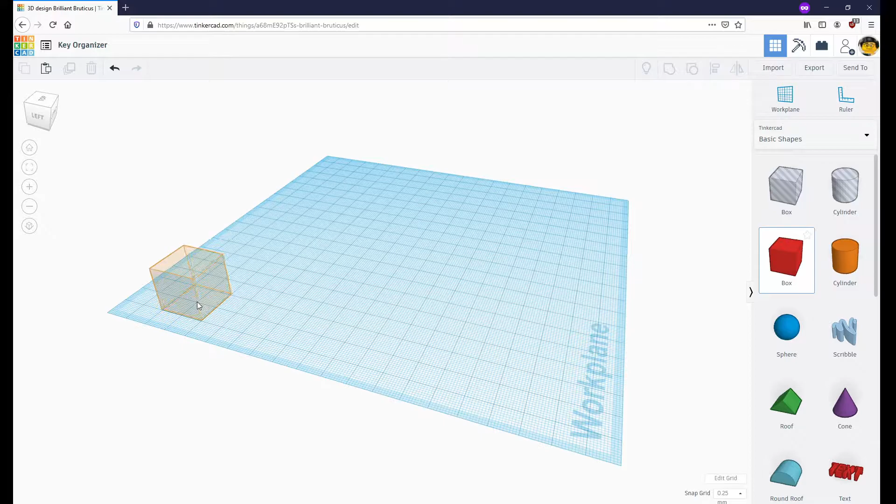Now, for the dimensions for this box, we want it to fit a piece of mail. I measured a piece of mail that I had, and it's approximately, for example, an envelope is approximately 22 centimeters by 10 centimeters, or in this case, 220 millimeters. But you'll notice that that is still a bit too large.

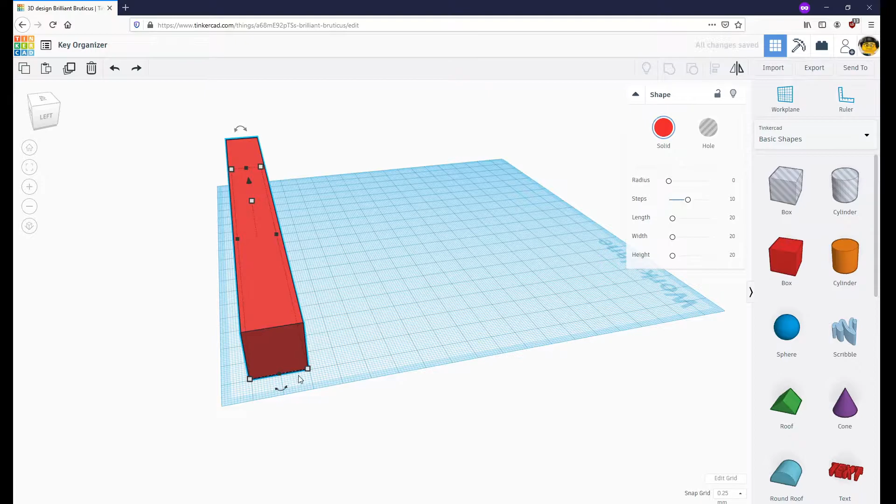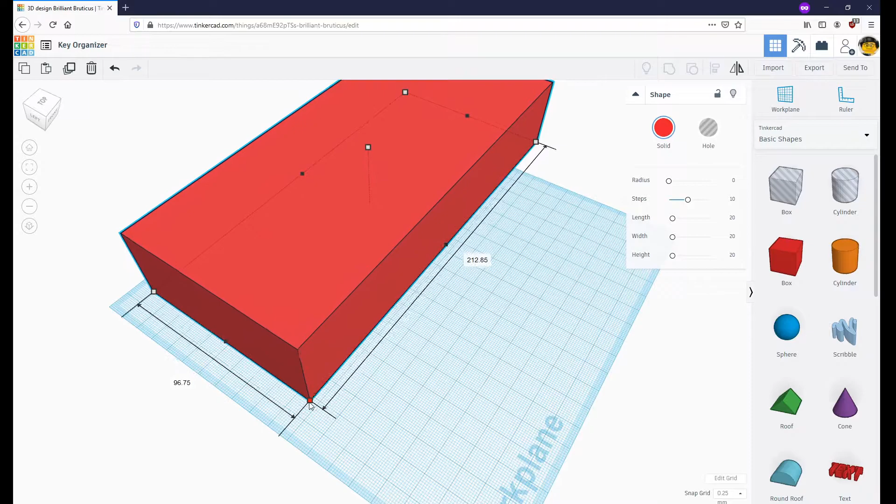Oops, I accidentally displaced it there by 100 instead of changing the dimensions. Now, in order to rectify this, there's two ways. We can simply click on the corner here and adjust each dimension manually. So if I wanted to cut it in half, I could just simply divide the number by 2. Or clicking on the corner and holding Shift keeps the aspect or dimension ratio while we scale up or down.

I prefer to enter things manually, it just makes it a lot quicker. We're just going to line it up with this corner here, because since we are using somewhat exact measurements today, we do want to make sure that our snap grid is lined up accordingly.

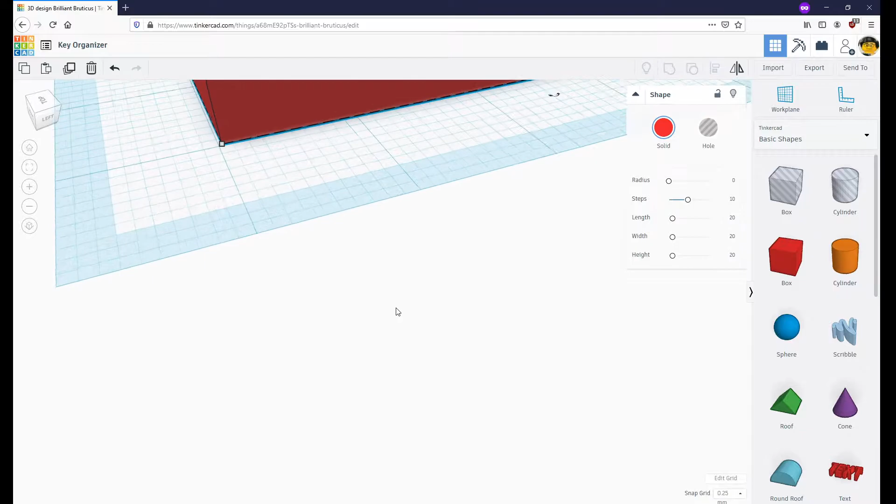So if I could just figure out how to zoom here, there we go. And keyboard controls, again, arrow keys, very useful. Just move it once along the grid and we're good to go.

So the dimensions that I started with are actually still a little too small. If we're trying to fit mail inside of this object, we need to actually expand it by a bit. So I'm going to give us about a 5 millimeter leeway on each side, making it about 120 by 60.

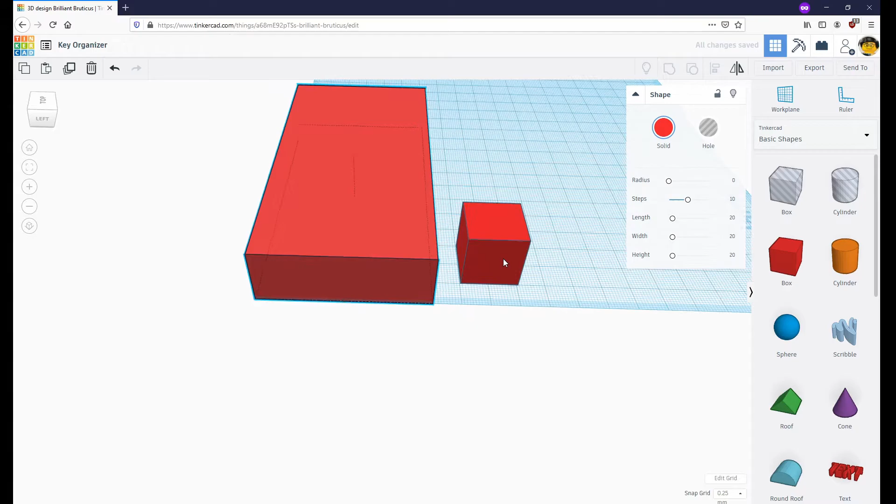The reason I did that is because we're actually going to be cutting out material from the inside of this box, as you'll see in a bit. So cutting out material, if we have too much of it, it makes it easier to work with as opposed to having to exactly measure the complete inside of this object.

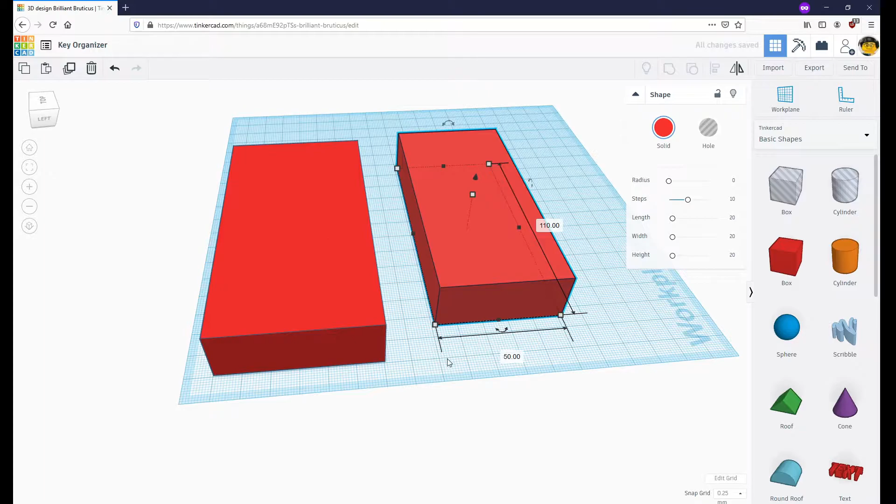So here, I'm simply adjusting this to be the length and width of a piece of mail. And now you can see why I did what I did. If I fit this box inside of the larger box, you can start to see how an envelope would actually fit inside of it.

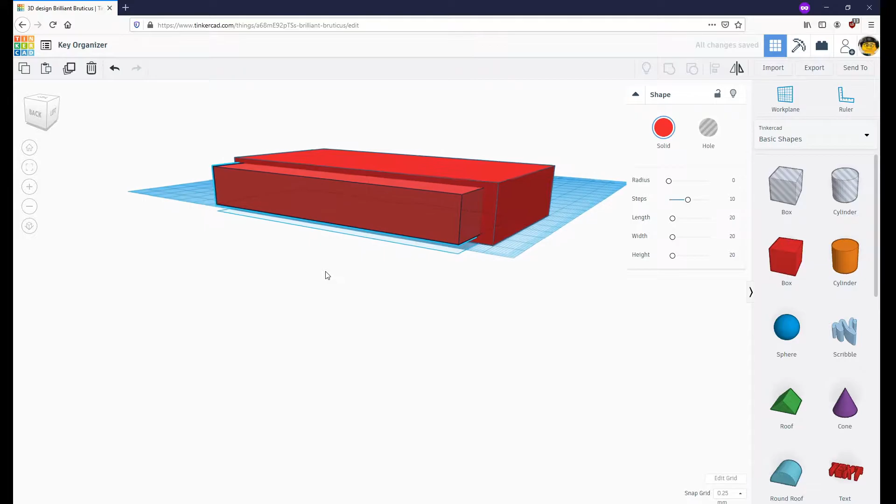So now we have an actual envelope holder as opposed to an envelope replacement, so to speak. Now, you can try and eyeball the position that you're going to cut out, or you can use the alignment tool up top by selecting both and simply click on the axes that you want to align it with. So here I'm going to click align and make sure it is aligned vertically so that we have the same amount of material both at the front and at the back, or in this case the top or the bottom.

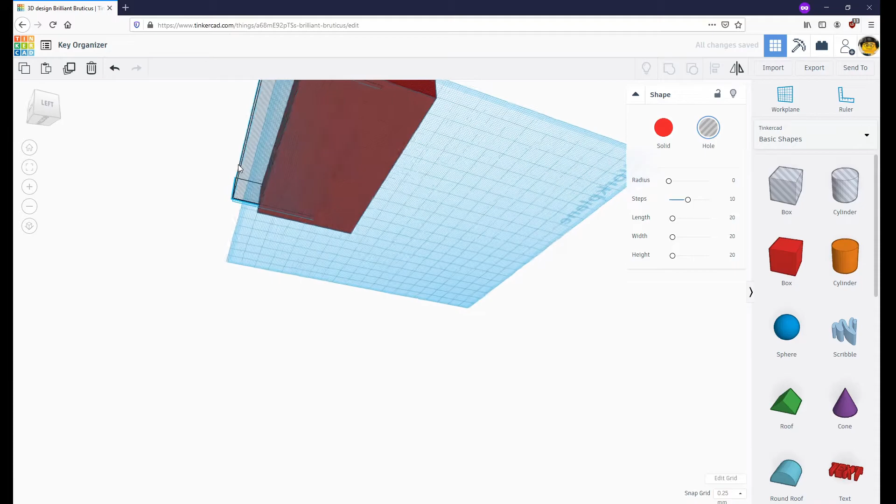I'm going to select the hole option for the middle box and making sure that I'm not going through the back of the object. I'm then going to group both of them, and you'll notice that it will cut out a nice slot for our mail to go into. And you select both, by the way, by holding Shift and just clicking on additional objects.

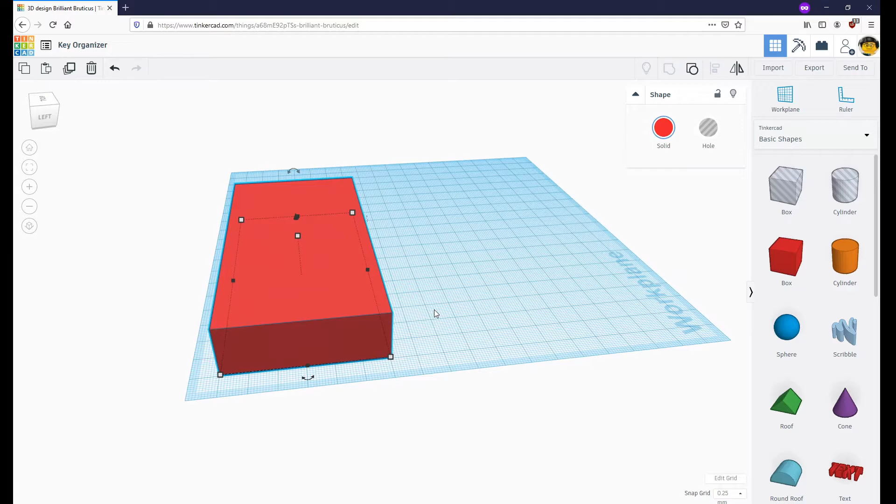And there we go. Now that you've got your mail slot figured out, well, what about the key organizer? So how do we go about adding hooks to the face of this object? We have a few designs that we can choose from that are kind of pre-made already, but what we're going to do here is insert a round roof.

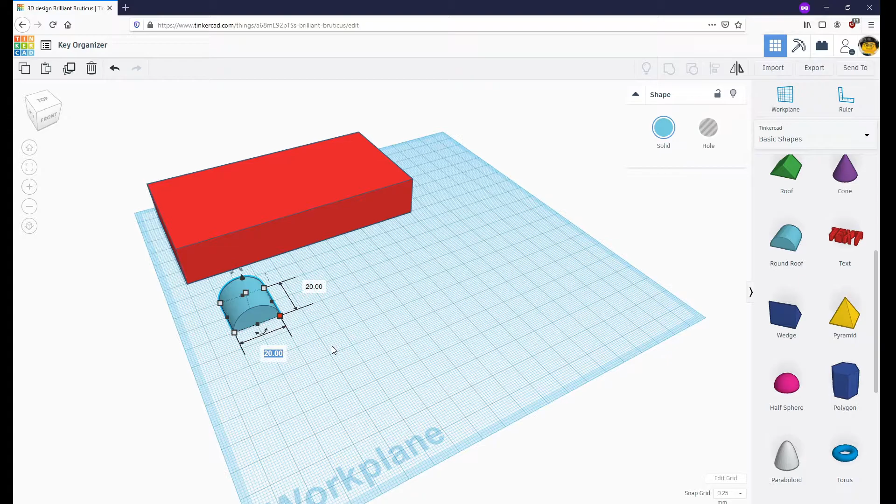So already you can see it kind of has a little hook shape, if only it were hollow. So let's go ahead and make it a little smaller, just because we don't really need it to be that large. It would be a good idea, by the way, to measure if you have any specific key rings. If your key rings are a little smaller, you might want to adjust the size or the width of these to make sure it fits. But for now, I'm just going to show you the process without worrying too much about the size.

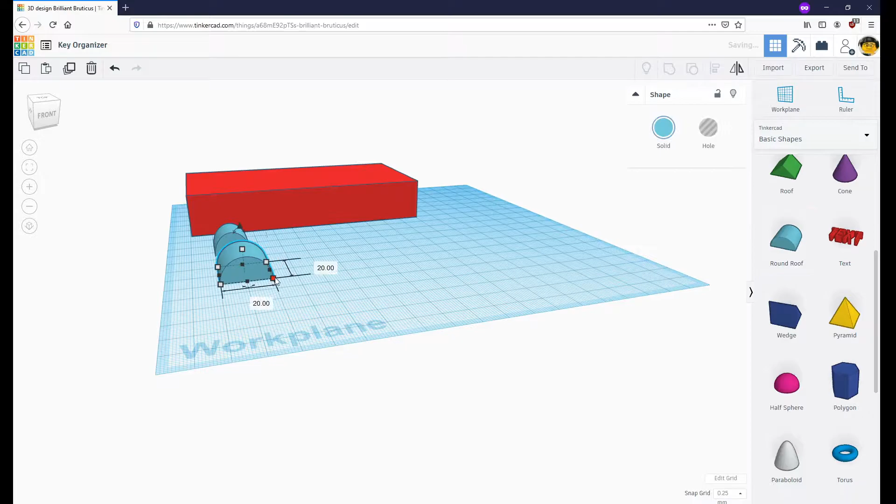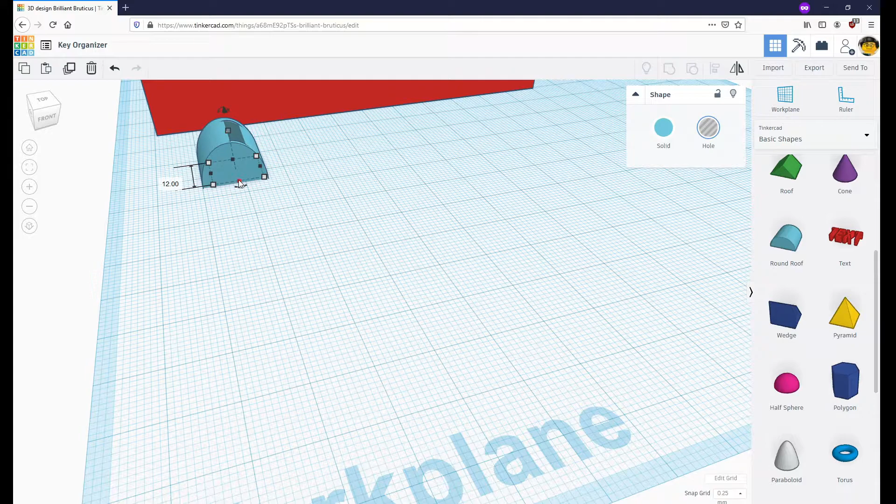So here, I changed the original to about 15 by 15. Here we have a 12 by 12. And what that's going to let me do now is slide this underneath the original, and simply adjusting the width and choosing hole for that object now lets me see what I'm going to be cutting out. And the solid that is remaining looks an awful lot like a hook.

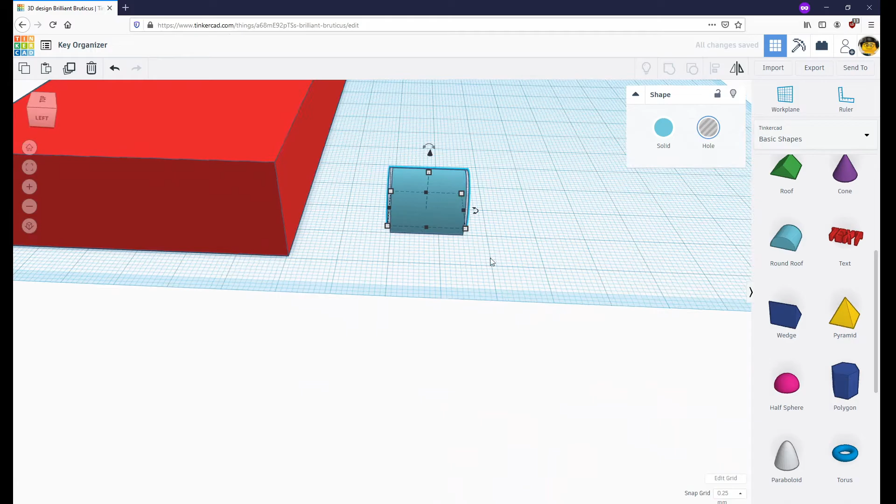So here, just using the keyboard controls to make sure it's lined up properly, I can then adjust the shape to be totally customized. Again, I can choose the length of the hook, the width of the hook, so I have full control over that, and that's part of the reason why we teach you these skills. So there you go. We have a hook that we can now adjust and attach to the face of our object.

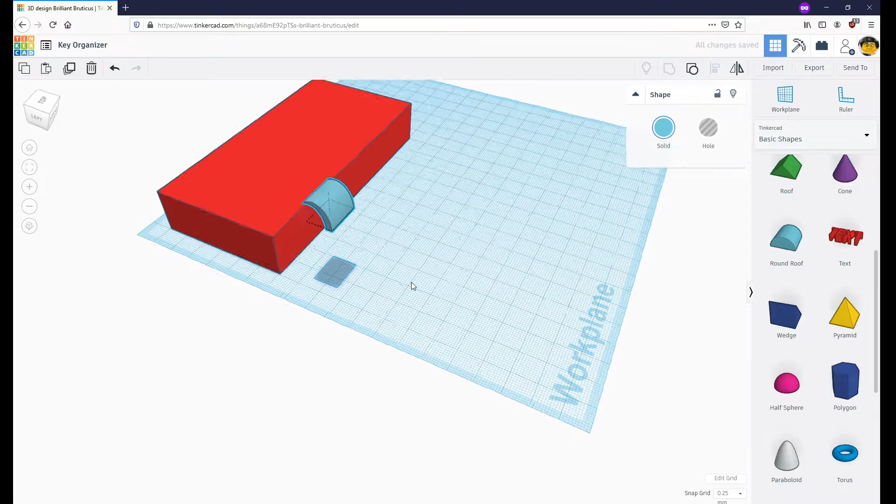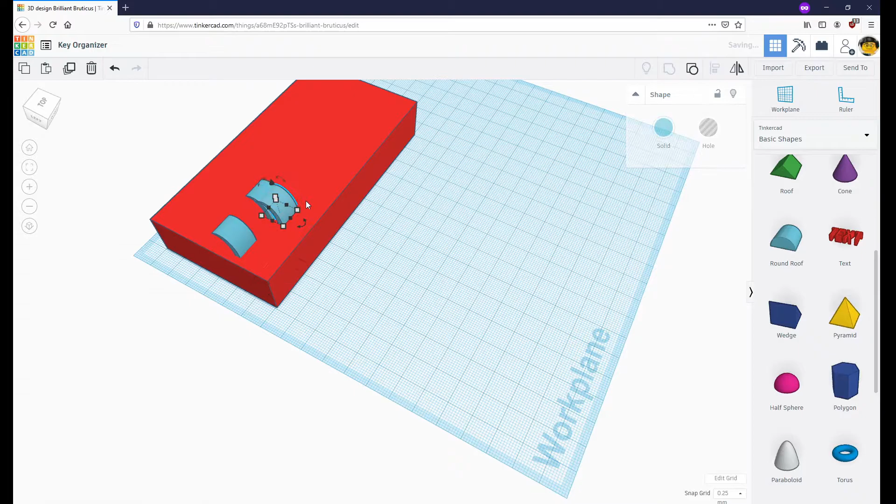Once you have it rotated and lined up, simply raise it up and move it on over to the face. Now you may need to move the camera around, zoom in, zoom out, do whatever you need to make sure it's lined up. Doesn't quite snap to it like we'd like, but here I do end up making it a little less wide. And I'm simply selecting and hitting Control C and Control V on Windows, Command C and Command V on Mac, and that lets me copy and paste all of these.

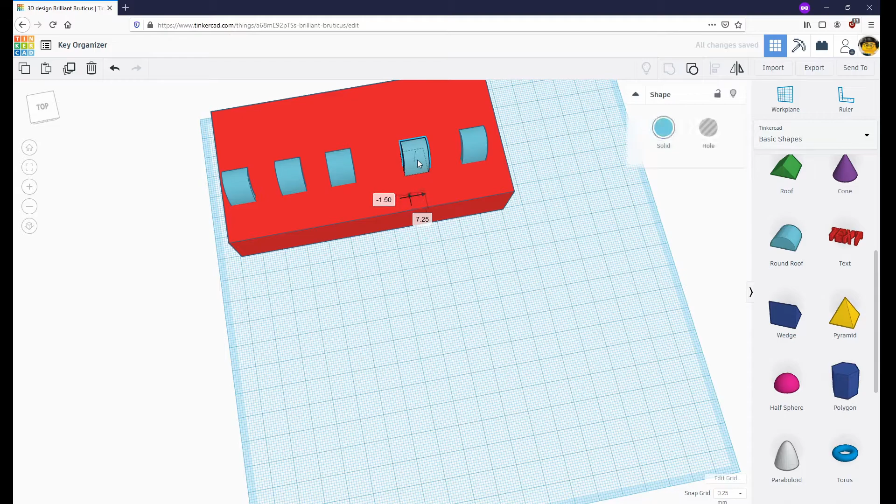And I want 5 of these going across. Now you'll notice they aren't exactly lined up just yet, and you'll see me do a little trick here in a second. So all I'm going to do is space them out according to how I want them. Say you wanted to hang an umbrella from this or hang a flashlight, well then you might need to adjust the spacing a little.

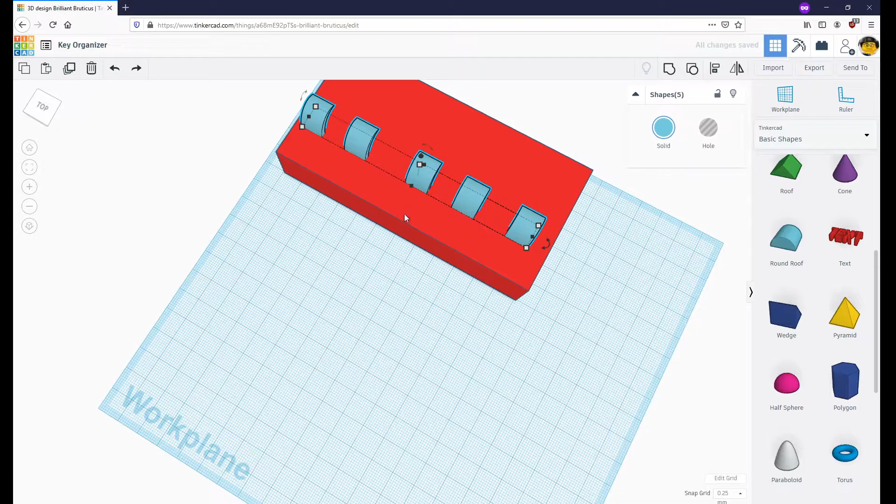But now I'm going to select all of them, and the alignment tool we used earlier comes in handy once again. There we go. So I just click the alignment along the one axis. If you try and align it along the other axis, it's not going to quite work. But here we have them lined up. So I'm going to use the keyboard controls, which maintains the alignment, just to move them over to the spacing that I like.

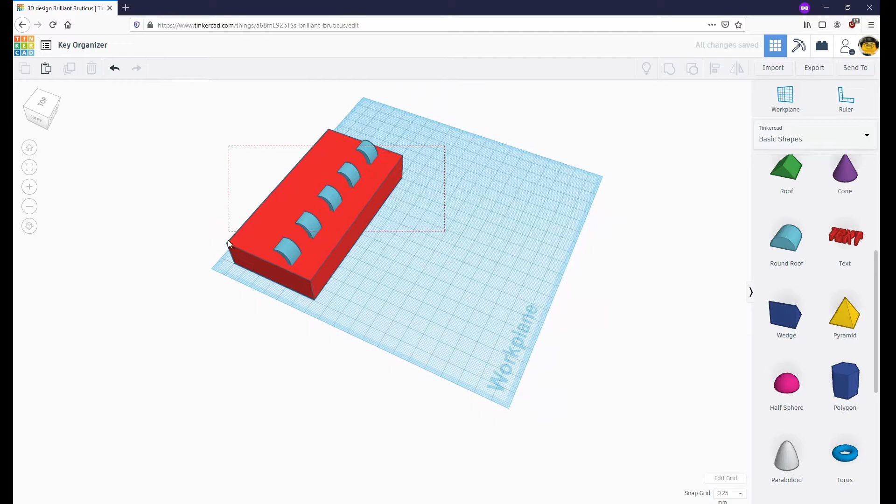So now you can kind of see this whole project come together. We have hooks on the face. We have our mail slot in the back. We can select everything, group it together. And you'd think, okay, well, we're ready to print, right? Well, not quite. There's still some work to be done.

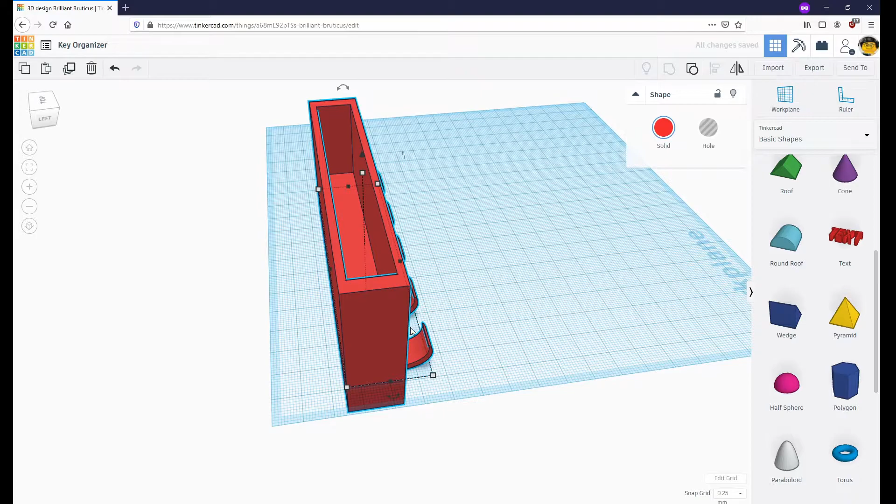In order to get this to print nicely, I'm actually going to rotate it 90 degrees and print it vertically. And that's just to make sure that this mail slot here will actually print from top or from bottom to top the way a 3D printer does. Otherwise, we'd have the whole front face hanging in midair, and the printer can't exactly print that.

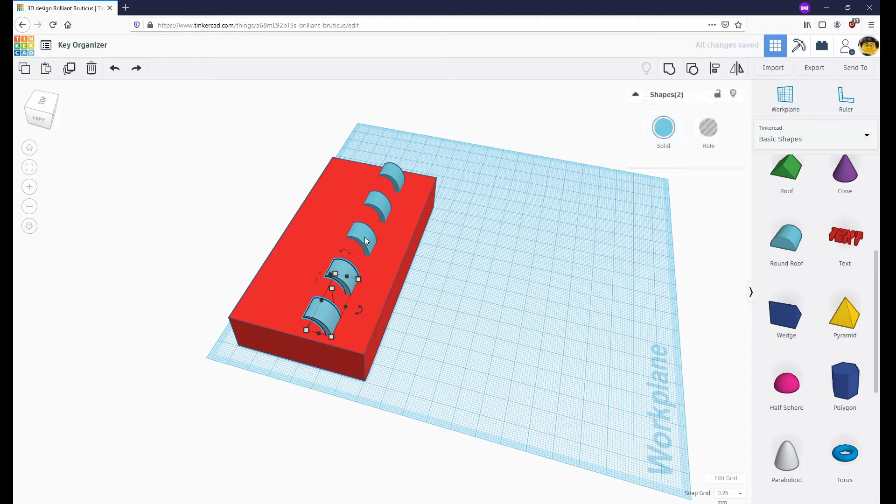So here, we're actually going to undo our little hooks, since they too, depending on the printer you have, the definition or the quality that would print wouldn't quite work, since it's a very curved surface. So let's try and make a more straight hook just to ensure a good quality print here.

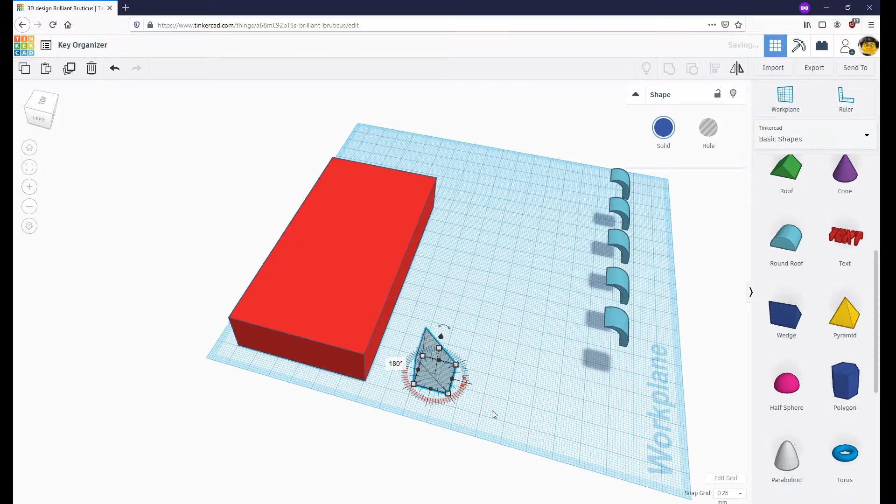So the same that I did with those curved ones, I'm going to insert an object and size it appropriately. And here, instead of inserting another one, I'm just going to copy and paste. Since we already have the dimensions that we want, I'm going to make one the hole, slide it over, make it a little wider just to make sure we do cut out the hole completely here. And now I can fully adjust the thickness of the hook or the loop that I'd like.

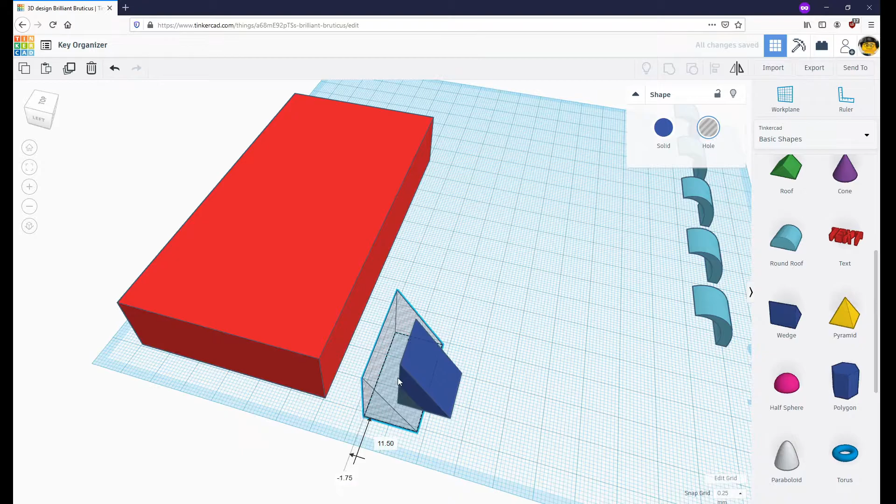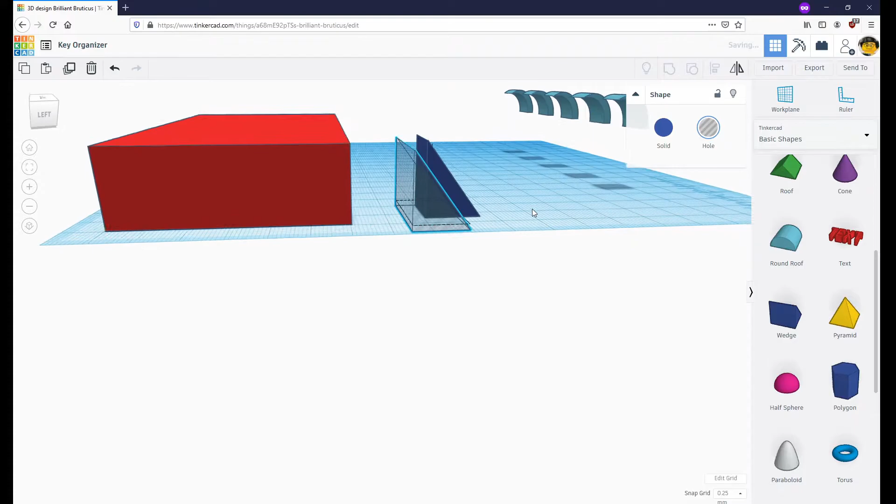And the reason I chose a more straight hook here, again, is just thinking about how it's going to print. The one that curves upwards away from the print bed is generally going to give us more issues than printing just a straight line here. So once I've got it lined up, I'm going to select both, group them, and there we go. We now have a fairly diagonal hook here.

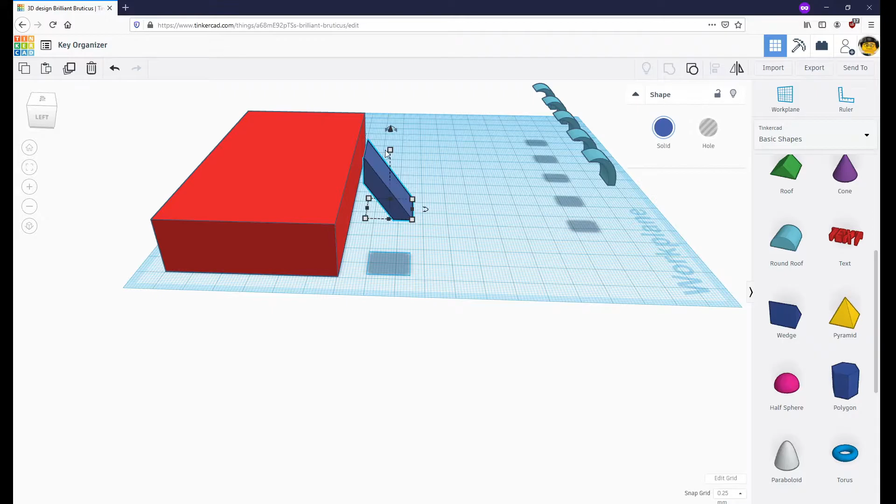Slide it over to the face of the object. And the same thing that I did with the other curved hooks, I'm just going to copy paste them all and line them up. So here is just me figuring out, okay, well, I can choose the exact height, or I can simply line it up and use the camera to make sure it is indeed attached to the object.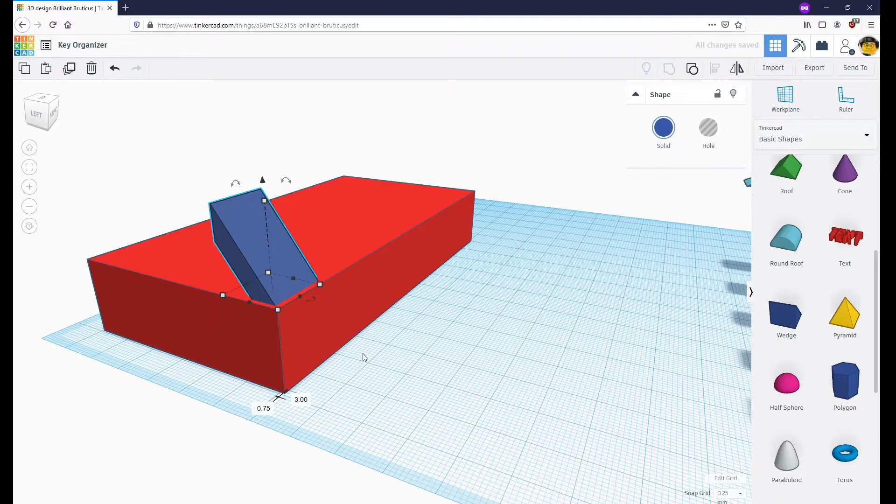So I am still floating in midair here. I want to avoid that. And once again, the arrow keys are going to be very helpful here if you do want to line it up perfectly. That's the whole reason we do change our snap grid. And you can always use the camera angles to help you do that. So here I'm still using the mouse, but I'm going to get it to just about along the edge. And once I'm satisfied, I simply copy paste 4 more of these little hooks.

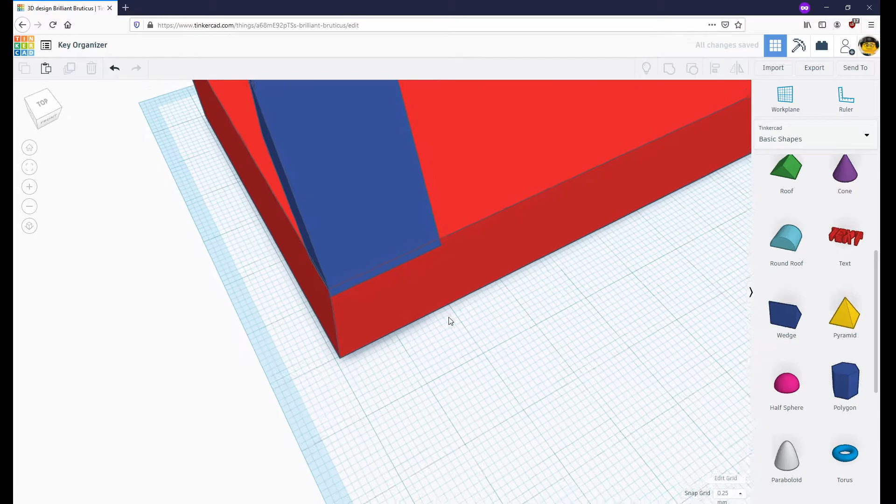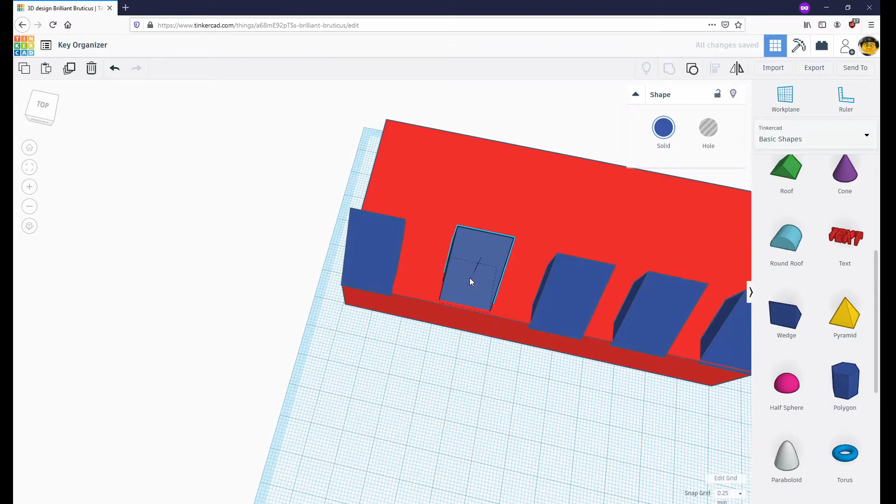So now simply make more copies, the same way we did with the others. You can use the keyboard arrows to keep it lined up and simply drag it across. I find it a little faster to just use the mouse and then align them all once they're done. I can even move them all 5 together if I have all of them selected.

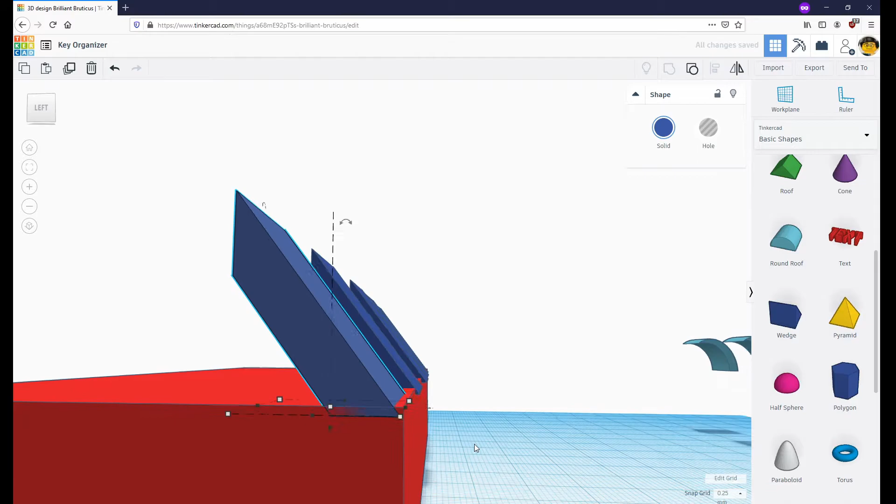So here I did notice that we have a little bit of material hanging over one of the edges, so I'm just going to push these back a little bit. Again, I mostly just want to avoid any printing errors, which tends to occur when you have material hanging basically in midair. So same with the second one, and again, all of these, just kind of push them back a little.

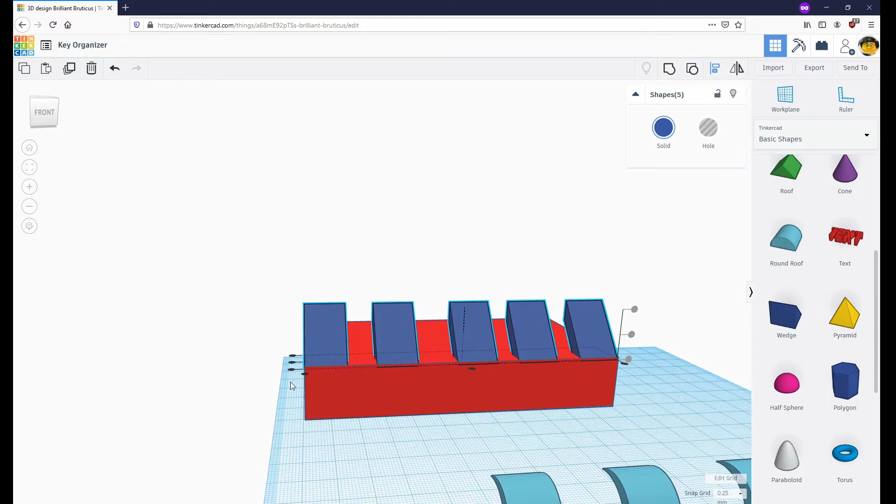Just to reiterate, I did choose the quote-unquote more flatter hook here just to avoid issues with printing. If you wanted to keep those curved hooks from the beginning, that would be totally fine, most printers should be able to print those. But just to avoid issues here, we're going as simple as possible, just to show you the process.

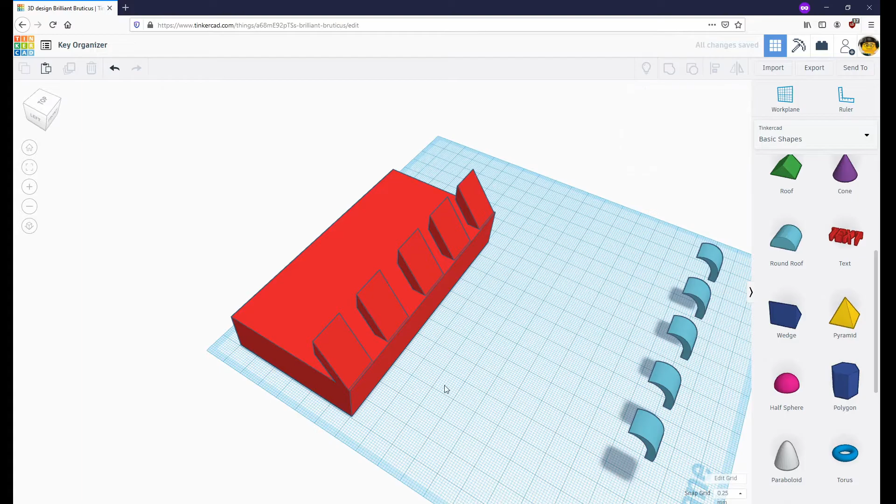So there we go, we've got it lined up as we did the first. Select everything and group them because we're almost there, friends. So now we are just going to rotate it 90 degrees to get it upright, and we're almost ready for printing. The first thing I'm going to do here is just make sure it is snapped onto our base or the work plane.

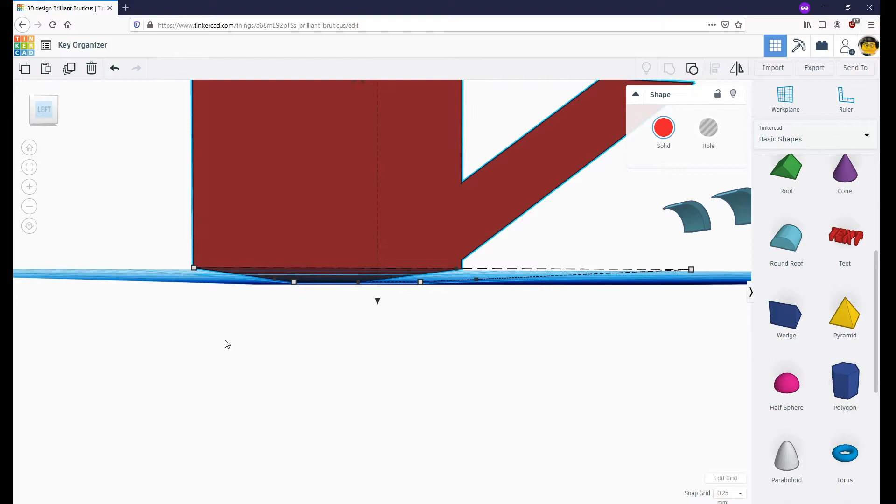I don't want any potential issues later when I go to import it to the slicing software. You can use the keyboard controls again, the arrow keys, you can use the mouse, you can use whatever you need to, just simply place it onto the work plane.

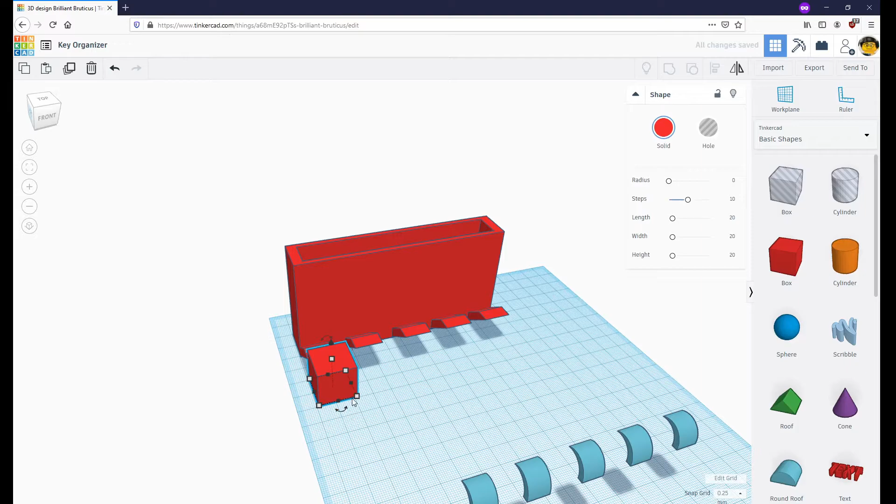So now, this is kind of bland here. I want to be able to see the mail that is inside of the mail holder or the mail slot. There are two ways to do this. The easiest way is to simply recreate the mail slot and then cut out a portion of it from that front face. Here, I've adjusted the measurements to again match what the mail slot is.

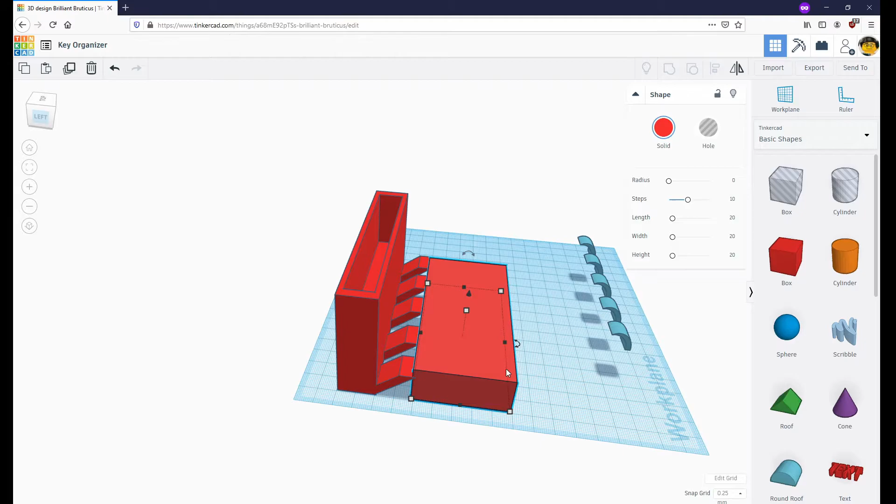And I'm simply going to rotate this 90 degrees. Once I do that, then I can simply bring it up to the face of my organizer here. Same thing as before, use the alignment tool. It's very useful here for making sure that we are centered.

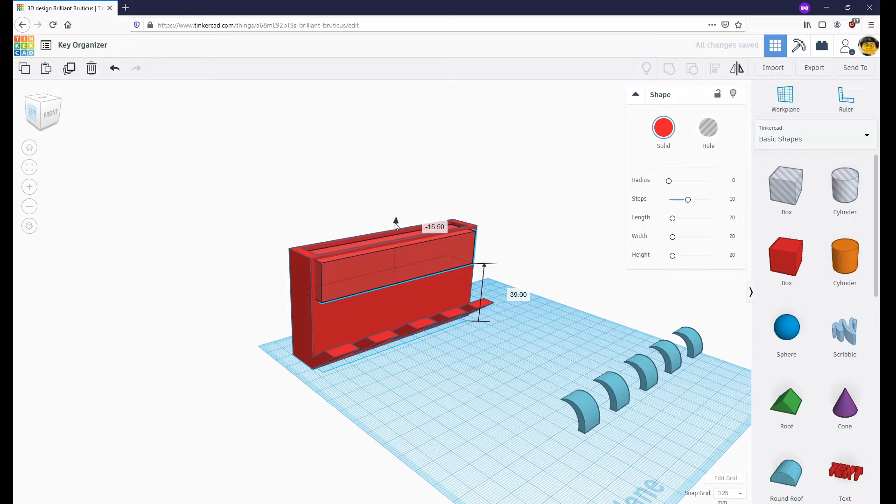I'm going to shrink this down just a little. And you can see, okay, well, if I were to cut out this specific hole or this specific cutout, I'm going to use the alignment tool here just to make sure you get a better view of it. I would be left with a bar of material that goes across the top.

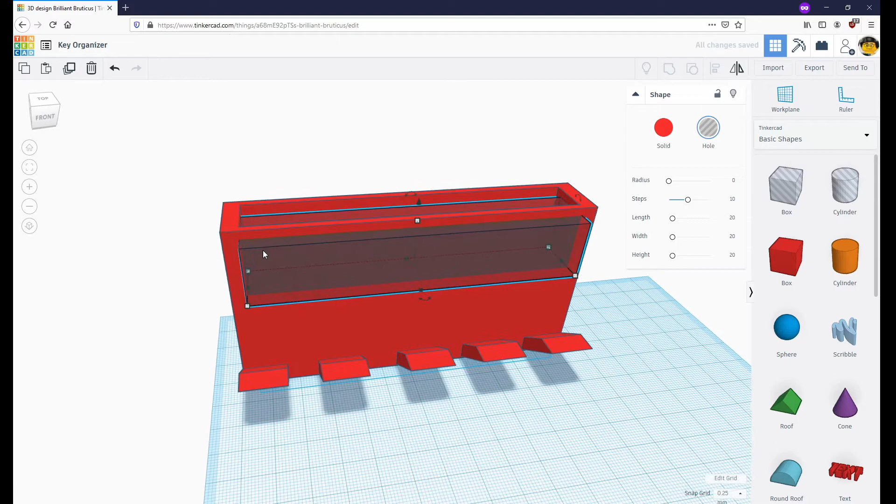Now, as with before, the reason we stood this up is to avoid any overhanging material. So if I were to cut this out, I'd still see that same issue. So all I'm going to do is bring this up to then cut out that top strip. One solution is to then recreate that bar using separate objects, but I'm pretty satisfied with how this looks, and I think it'll hold the mail well enough.

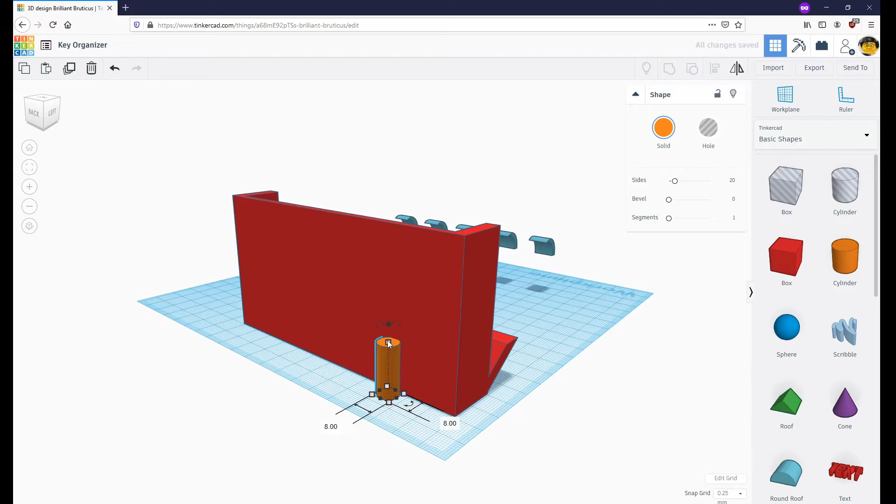So let's start thinking about how we're going to hang it on the wall. The last step here now is to think about how exactly this is going to attach to our wall. Well, if you have thumbtacks or nails already installed, it's as easy as inserting the cylinder here. Make sure that it is wide enough, so about 8 millimeters here on each side.

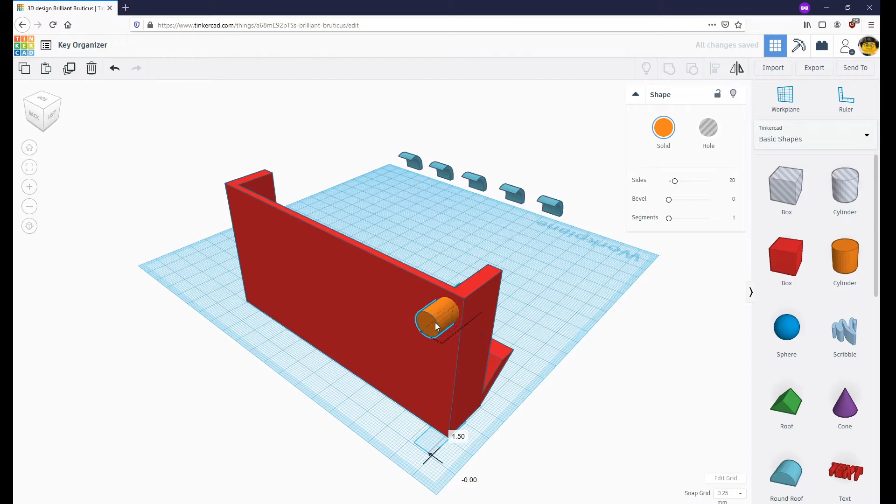Rotate it 90 degrees, and now you can see how we're going to punch out a hole near the top. The reason I chose the top is to just make sure that it does hang well. If we choose anywhere near the bottom half of this object, and if we load mail up on the top, it has a chance of falling, and I don't want that.

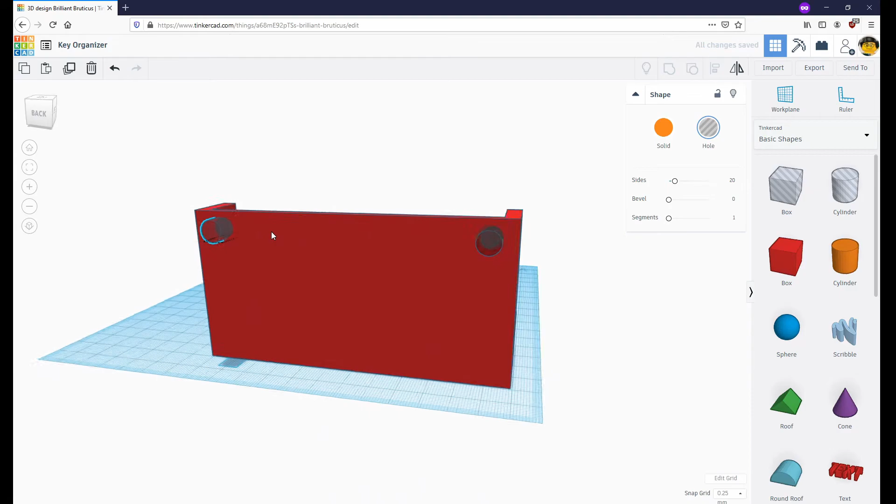So here, select hole. We can recreate another cylinder, or we just copy and paste, which is what I'm going to do, and simply drag it along to the other side. Now here, you could make sure that they are equidistant, and make sure and line them up properly, which we're going to do here using the alignment tool.

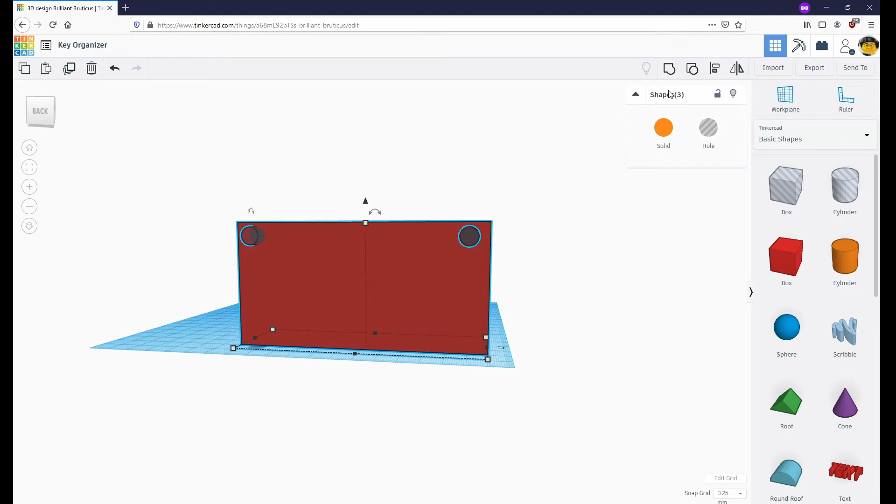And again, if you wanted to, you can use the keyboard arrows to simply make sure they are equally spaced. For me, I have full control over the thumbtacks or the nails that I put in my wall, so again, I don't need it to be any specific spacing here. It's not going to be too heavy of an object.

But there we go, we'll just delete the extra hooks, and we have our complete organizer now that we can print and hang on our wall.

Do be aware that at the very beginning we did scale it down by about half, so when you do go to print, you want to make sure you scale it back up double. That way you have a mail slot that can actually fit actual mail as opposed to just fitting half of an envelope. So that's it, folks.